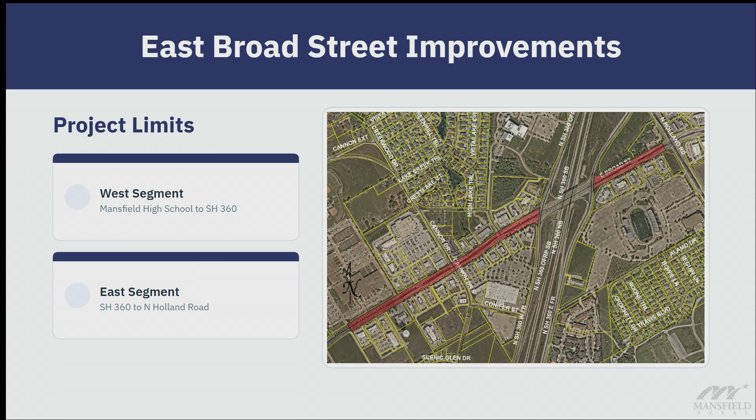If you've ever driven down East Broad during the morning commute, school pickup, or afternoon rush, you've probably experienced firsthand why these improvements are needed. The corridor has served Mansfield well for many years, but as the community has grown, traffic has increased, and the roadway has continued to age. At the same time, continued development and additional activity have placed greater demands on the corridor.

As you can see in these photos, the pavement has reached a point where patching is no longer the most effective solution, making full reconstruction the right approach.

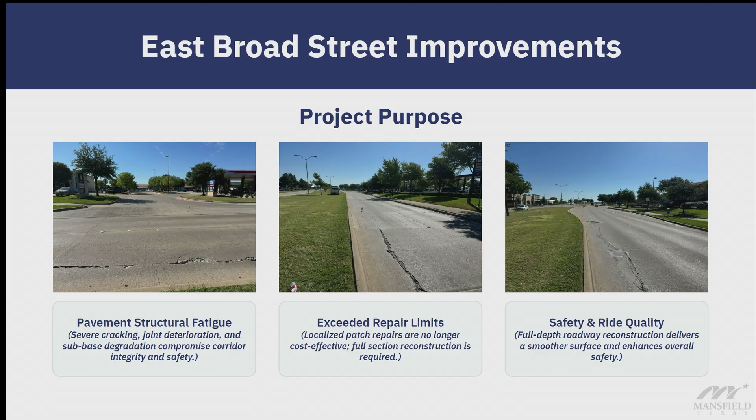So how exactly are we addressing those needs? The project will expand East Broad Street to an asphalt road with 3 lanes in each direction, add dedicated turn lanes, and construct a new signalized intersection. These improvements are designed to better manage traffic throughout the corridor while improving access at key locations, including the fire station.

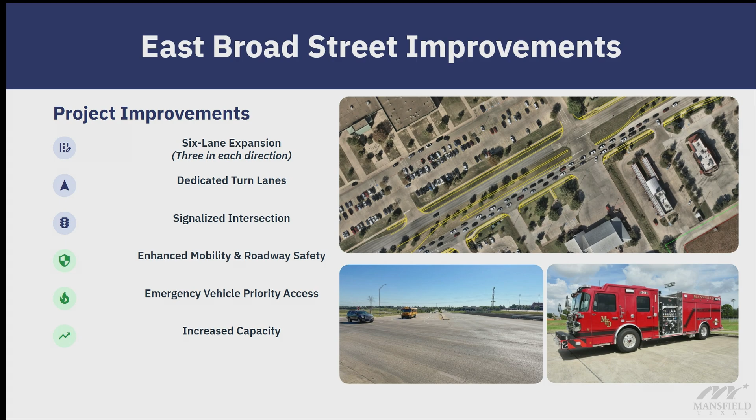Beyond the roadway improvements, the project includes several upgrades throughout the corridor. We'll be replacing aging water and storm drainage infrastructure, upgrading traffic signals at other locations, roadway lighting, improving sidewalks, and incorporating landscaping and streetscape enhancements. Because East Broad is one of Mansfield's most prominent corridors, these landscape improvements are intended to complement the roadway investment and create a corridor that reflects pride in the community.

Completing these improvements together allowed us to address multiple needs within the corridor within one single construction project.

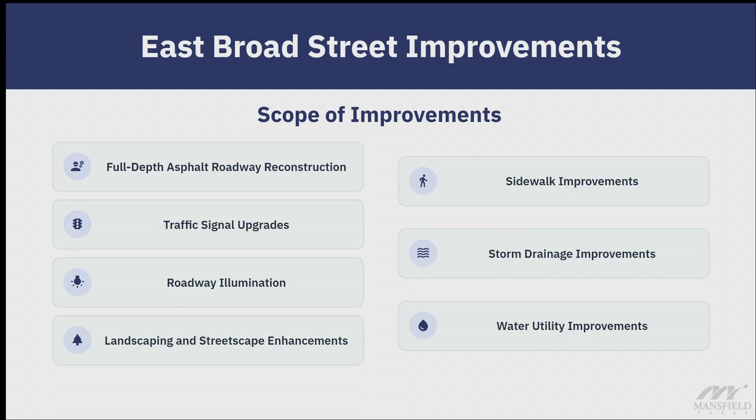Construction is anticipated to begin in late August. Our goal is to have the final traffic configuration, the 3 lanes each direction, in place by late 2027, with overall project completion expected spring of 2028. As with any construction project, these dates may be adjusted due to weather or other unforeseen conditions.

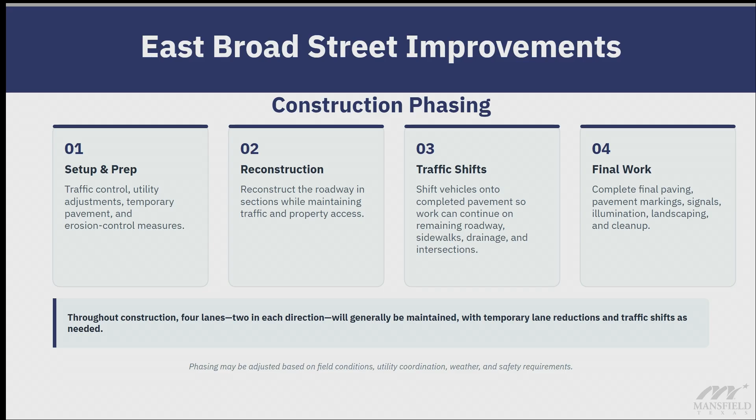Rather than walking through every individual traffic shift or phase, we simplified the project into 4 major stages to provide a general overview of how construction will progress. We'll begin with construction preparation throughout the corridor, followed by reconstructing the roadway in sections while maintaining traffic. As new pavement is completed, traffic will shift onto these sections so construction may continue. The project will finish with final paving, traffic signals, streetscape improvements, and project cleanup.

As with any major roadway project, there are several things you can expect during construction. Rather than reading through every point on this slide, I will highlight a few of the key points.

From a traffic standpoint, 4 lanes, 2 in each direction, will generally be maintained. As construction progresses, drivers should expect temporary lane shifts, and in some locations and phases, stretches where traffic may be reduced to 1 lane in a particular direction.

You'll also see active work crews, equipment, utility work, temporary pavement markings, and traffic control devices through the corridor as work progresses and moves from one phase to the next.

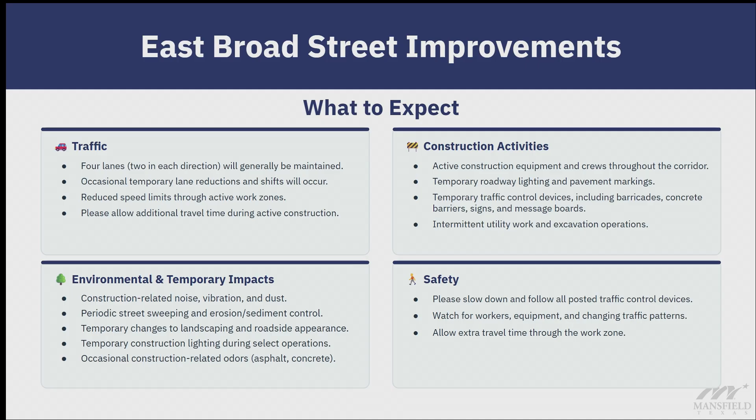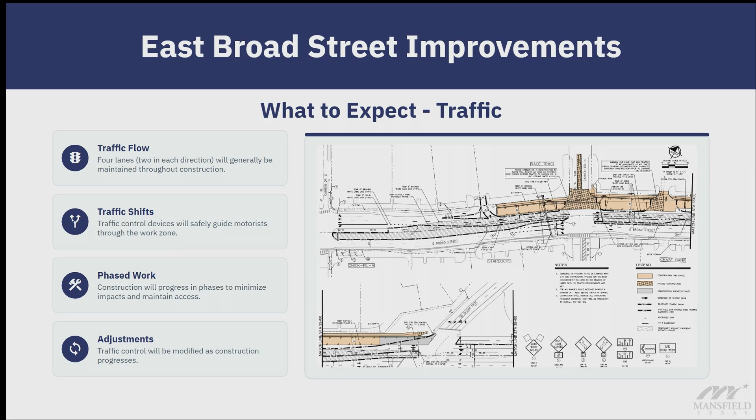Throughout construction, traffic patterns will change as work progresses from one phase to the next. Temporary lane shifts and traffic control devices will help safely guide motorists through the work zones. While there may be localized impacts during certain operations, our goal is to keep traffic moving as efficiently and safely as possible.

We understand how important access is for residents, businesses, and emergency services. The city and the contractor will coordinate closely with property and business owners to maintain access, provide advance notice of temporary driveway work, and use temporary signage to help direct customers and visitors throughout construction.

Our goal is simple: to help everyone travel safely through the work zone. Please pay attention to changing traffic patterns, follow temporary signs and directions from traffic control personnel, watch for workers and equipment, and allow a little extra time when traveling through the corridor.

When construction is complete, the community will have a modern roadway built to serve Mansfield for many years to come. Together, these improvements provide better traffic flow, upgrade infrastructure, improve pedestrian accommodations, enhance landscape, and a corridor that reflects the importance of Broad Street to the city of Mansfield.

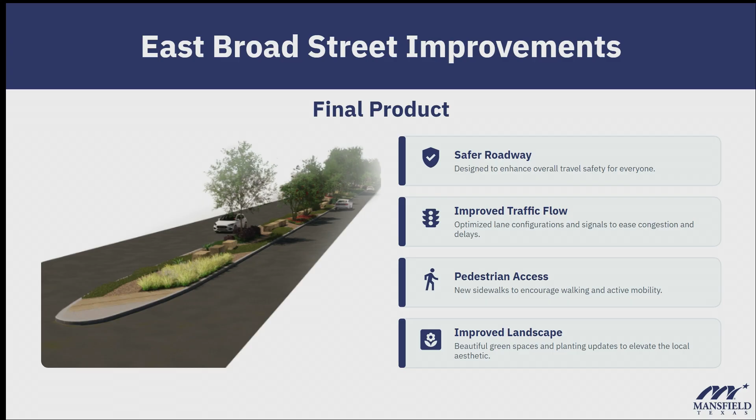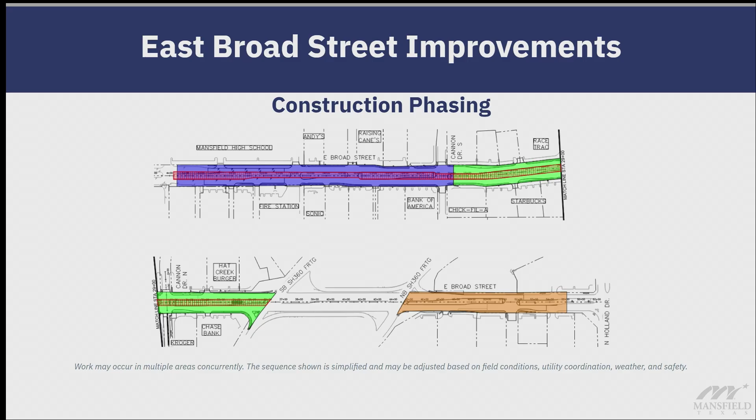Yes, so the question was how to manage deliveries for semis to businesses. We definitely encourage businesses to get with us so we can coordinate any deliveries as needed. The contractor and the city are going to work closely with them, so if we need to make any adjustments, we'll be happy to do so. We do understand that through construction there are going to be some segments that are going to be somewhat of a tight squeeze, but we'll be happy to work with them however we can.

So I'm with Clean Getaway Car Wash. With relation to dust, will there be any efforts to mitigate that at all? I mean, I know it's impossible to eliminate it, but clearly if the customer gets a wash and drives off covered in dust, that's not going to be good for us.

So the question was, what will we do to mitigate some of the construction activities and nuisances? So yes, we'll work with the contractor to minimize them as much as possible. That includes some dust control throughout the project. We do understand that construction does bring its set of nuisances, so we'll work to minimize them as much as possible.

Yes, sir. And we'll work with the contractor to concentrate those efforts on the more affected areas. Thank you, Luke.